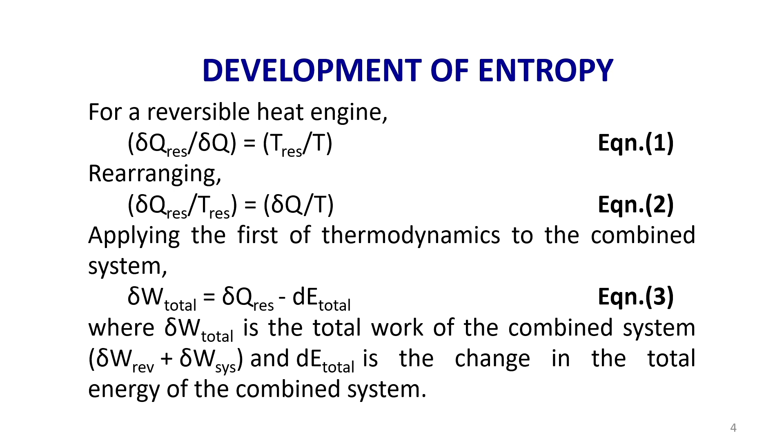This is based on the equation Q equal to W plus delta E; based on this equation only I have rewritten it here. Now, substitute equation 2 in 3. What is 2? 2 is del Q reservoir by T reservoir is equal to del Q by T. So, substitute 2 in 3.

So, when you substitute, this is 4. Instead of del Q reservoir, I am substituting this term. So, find out the value of del Q reservoir from equation number 2. The left side has no change: delta W total is equal to T of reservoir into del Q by T, that is the first term, minus dE total.

Okay. So, again let me emphasize, W total is the work of the combined system, which comprises both the heat engine, which is of reversible type, and the system, here considered as the piston cylinder arrangement, and dE total is the total energy of the combined system.

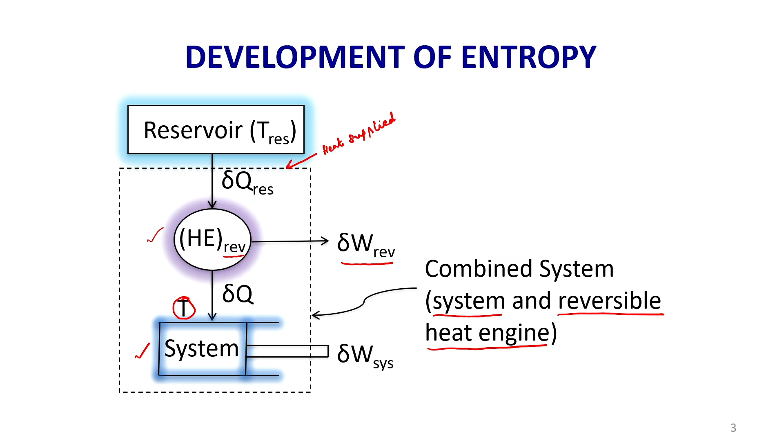That means this reversible heat engine would be producing this much work by operating with a single reservoir only, which is not possible because it violates the Kelvin-Planck statement of the second law of thermodynamics. Therefore, the cyclic integral of W total is less than or equal to 0, and this term cannot be greater than 0.

So, out of these two terms, let me write the total term, this is 0. This is a property, and the cyclic integral of a property is 0. So, the remaining term is only this term. T of reservoir cannot be less than or equal to 0.

So, the only quantity that can be 0 is the cyclic integral of del Q by T, which is less than or equal to 0, because this term cannot be equal to 0. That is equation number 6. This forms the basis for the development of entropy. Later, ds equal to dQ by T, which we will see.

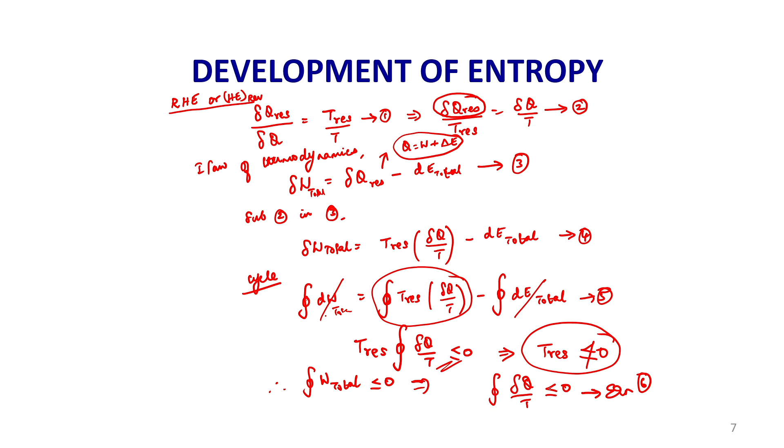Equation 6 is known as Clausius inequality, which is valid for all thermodynamic cycles, whether it is a reversible cycle or an irreversible cycle. If delta Q divided by T is less than 0, it is for an irreversible cycle. For a reversible cycle, the cyclic integral of del Q by T is equal to 0.

If it is less than 0, it becomes irreversible. If it is greater than 0, which is not possible, it is for impossible cases. If it is 0, it becomes a reversible cycle. So, this equation is known as Clausius inequality, because it can be less than 0 or equal to 0, so there is some inequality.

Next, with this background, the term entropy has been introduced. A quantity whose cyclic integral is equal to 0, in this case the cyclic integral of dQ by T, depends on the state only and not on the path of the process. It depends upon the initial state or the final state, not on the path taken by the system. Therefore, the quantity cyclic integral of dQ by T must represent a property.

It should be a property because it does not depend on the path, and that property was named entropy by the scientist Clausius. So, if you take the previous one, cyclic integral of del Q by T, this is nothing but dS, where S is the letter used to represent entropy.

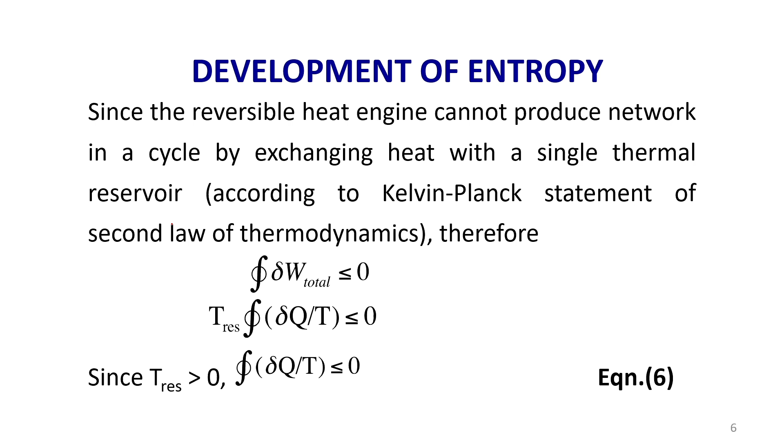So, this property was named by Clausius as entropy. dS is equal to cyclic integral of dQ by T, that is equation number 7. dS is like dU: dU is change in internal energy, dT means change in temperature, so dS means change in entropy. Equation 7 represents the change in entropy of a system during a process.

Entropy is an extensive property of a system and it is represented by the letter S. It gives a measure of molecular disorder in a system. That is the simple definition of entropy. For a reversible process 1 to 2, the initial state is 1 and the final state is 2, so the change in entropy is final entropy minus initial entropy, S2 minus S1.

So, here I will mention, for a process, let me write it here, for a reversible process 1 to 2, this ds becomes S2 minus S1, that is the change in entropy, and integral 1 to 2, lower limit is 1, upper limit is 2, because the initial state is 1 and the final state is 2, integral of cyclic integral of dq by T.

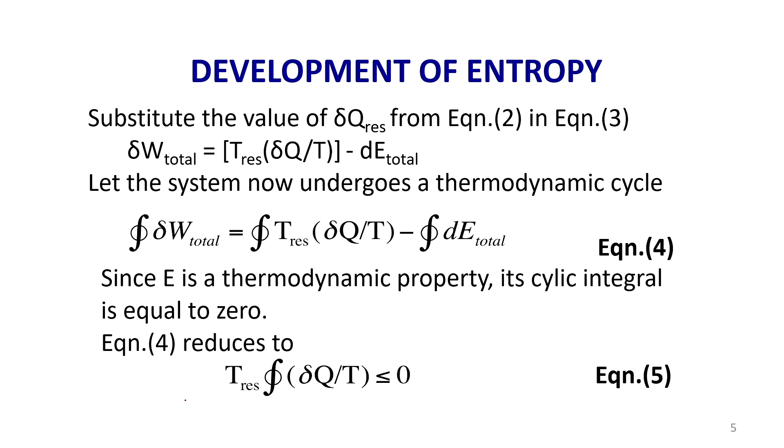So, S2 minus S1, sorry, there will not be any cyclic integral term, because the smaller circle is to be used only for a cycle, not for a process. For a process, when we say 1 to 2 or 2 to 3, it is just the integral without the circle. So, for process 1 to 2, I will write it again, S2 minus S1 is equal to integral of 1 to 2 dq by T, or del q by T. Since I am using the term del, you can use del q by T.

So, if it is for process 2 to 3, the lower limit will be 2, upper limit will be 3, I will write dq by T. For more than one process, that is minimum 2 processes, we can write integral dq by T between the limits 1 to 2 plus integral dq by T between the limits 2 to 3. The smaller circle is to be used only for a thermodynamic cycle.

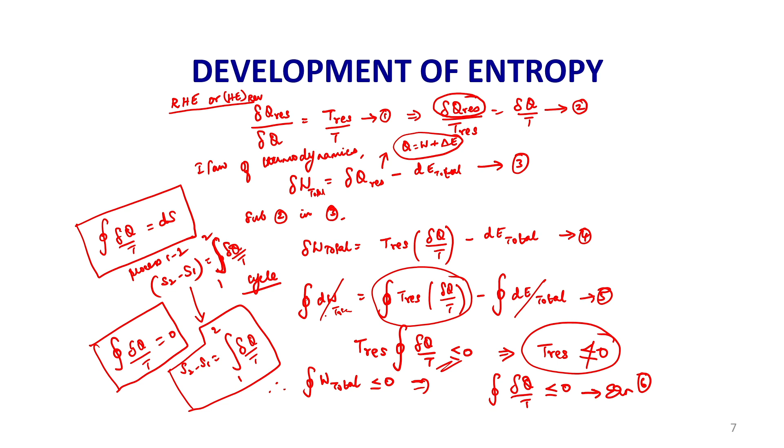So, this is the change in entropy of a system which undergoes a reversible process 1 to 2. The equal to sign indicates the process is a reversible one. When we say ds equal to dq by T, that means the process is reversible, because that is based on the Clausius inequality. For a reversible process, it is equal to; if the cyclic integral of dq by T is less than 0, it is for an irreversible process.

Now, let us see how I am writing equation number 7. Equation number 7 is this equation. Here I am writing equal for a reversible process. For an irreversible process 1 to 2, equation 7 will be written with a less than symbol instead of equal to. Do not put the greater than symbol, that becomes an impossible cycle. It is not possible to have a cycle in which ds is greater than dq by T. So, that is an impossible cycle, where dq by T is greater than 0.

Let us consider the process 1 to 2, dq by T is less than 0, and that means dq by T becomes less than ds, or in other words, rearranged, ds is greater than dq by T between the limits 1 and 2. The entropy change during an irreversible process is always greater than the entropy transfer. The entropy change is S2 minus S1, final state minus initial state. If dq by T is less than ds, obviously ds should be greater than dq by T, like a is less than b means b should be greater than a.

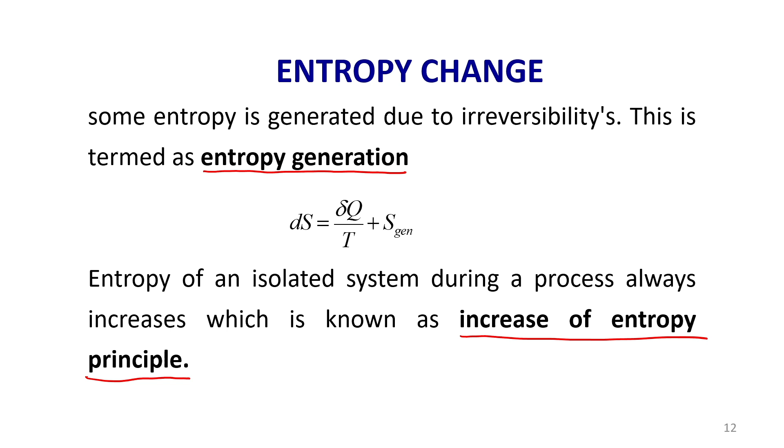The difference between the entropy change ds and the entropy transfer is the entropy generated in the system, which is the irreversibility, the difference between the reversible work and the actual work done by the system. So now let us solve some numerical questions based on these concepts.

1 kg of saturated water vapor at 100 degrees centigrade is condensed to saturated liquid. Condensation, like evaporation, is a phase change process, so the pressure and temperature remain constant. In this constant pressure process, heat is transferred to the surrounding air at 25 degrees. What is the net increase in entropy of the water and surroundings? The mass of water is 1 kg, the temperature of 100 degrees centigrade is converted into Kelvin, and the air temperature is 298 Kelvin, that is 25 degrees centigrade.

First, let us take the properties from the steam table. This is table number 1, because temperature is given here. As I told in the previous class, if the pressure of the steam is given, we refer to table number 2; if temperature is given, you refer to table number 1. So this is table 1. In the first column, you will have temperature.

So, the given temperature is 100 degrees centigrade. So, corresponding to 100 degrees centigrade, I have taken the value of HFG, that is latent heat, 2256.9. Let us see the table. See, this is HFG, and this is SFG.

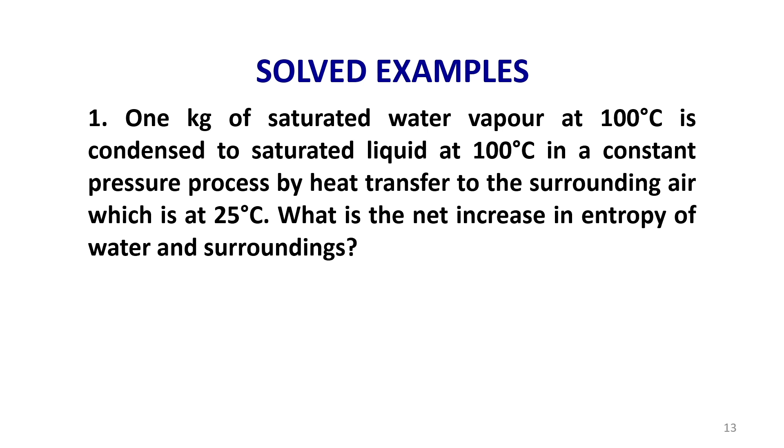So, direct formulas are there, mass into this one, like how you calculated heat rejected. So, this is 1 into the change in entropy. So, SFG I have taken 6.048, that is from the steam table. So, these are simple calculations. And next, the question asked is, what is the net increase in the entropy of water and surrounding. So, we should know the entropy change of the water and the surrounding, then only we can find the net increase.

So, for the surrounding, it's a standard formula, Q by T naught. T naught is the reference temperature. Normally, for calculations, it is taken as 25 degrees centigrade. Even if it is not mentioned, you can take 25 degrees. In some cases, they will take it as 20 also. But here it is given as the ambient temperature, that is 25. So, I have taken the same 25, converted into Kelvin. The temperature should be substituted in Kelvin only, not in degree centigrade.

So, we can calculate the change in entropy of the surrounding. The net entropy change is the summation of the entropy change of the water and the surrounding. So, this is the net entropy change, 1.522. It is a very simple calculation problem. So, this is what we have been asked to find. So, to summarize this problem, the net entropy change is equal to change in entropy of water plus change in entropy of surrounding. Okay.

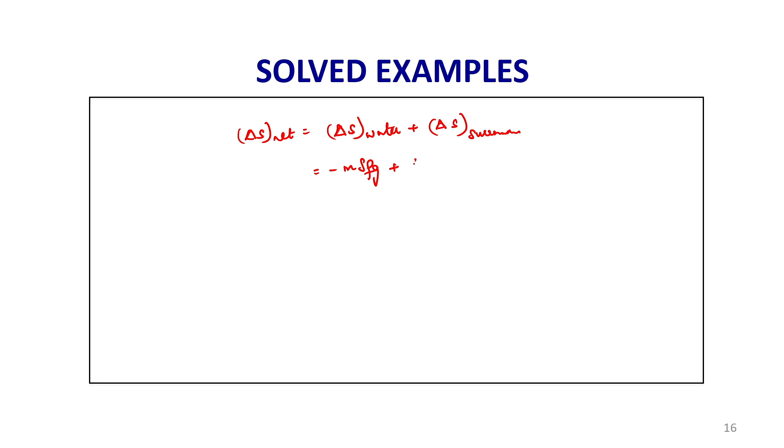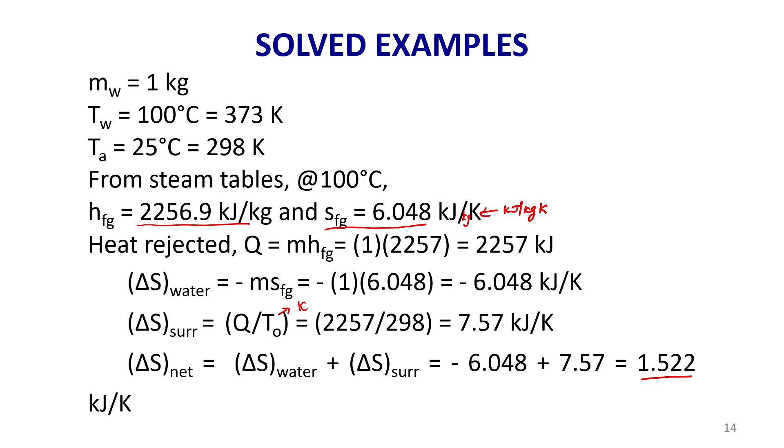This is minus m into SFG, SFG to be taken from the steam table, and this is Q by T naught or TA. Here T naught is equal to TA, the ambient temperature. You can use TA also, okay, but generally in the standard books, the symbol T naught is used for the reference temperature. So, this is a very simple one, so you can calculate.

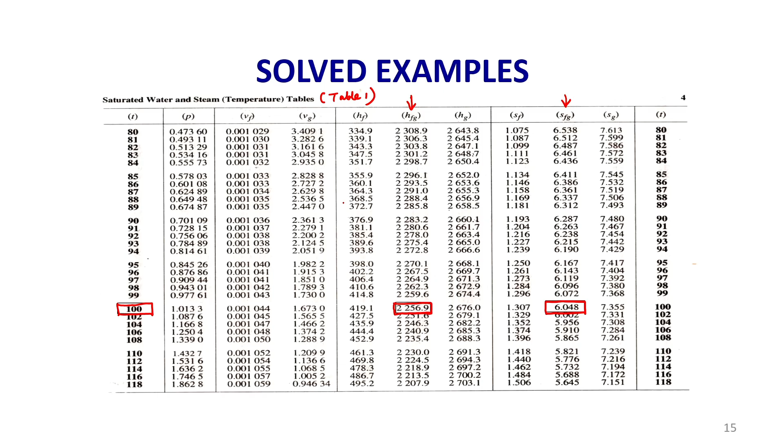So, it has to be found as 1.522 kilojoule per Kelvin. When we multiply the entropy by the mass in kg, the kg terms will get cancelled. So, instead of kilojoule per kg Kelvin, we will get kilojoule per Kelvin.

Let us move to the second question. A rigid tank contains 5 kg of saturated vapor, that is the refrigerant R134A. R134A is tetrafluoroethane, at a temperature of minus 18 degrees centigrade. The refrigerant is now cooled while being stirred until its pressure drops to 1 bar.

Actually it should be like minus 26 degrees centigrade, because the temperature is given. Let us take this as minus 26 degrees centigrade, because one data is given in temperature, another is in pressure. Of course, we can find the saturation value from the table. So, let us take this minus 26, which I have mentioned.

Determine the entropy change of this refrigerant during this process. Assume the dryness fraction of the refrigerant at the final state is 0.86. Let us recollect what we mean by dryness fraction. In other words, it is called the quality of the steam, represented by the small letter x. x equal to 0.86 means it contains 86% vapor and the remaining 14% liquid. So, it is in the two-phase region, a mixture of liquid as well as vapor. Vapor content is more and liquid content is less.

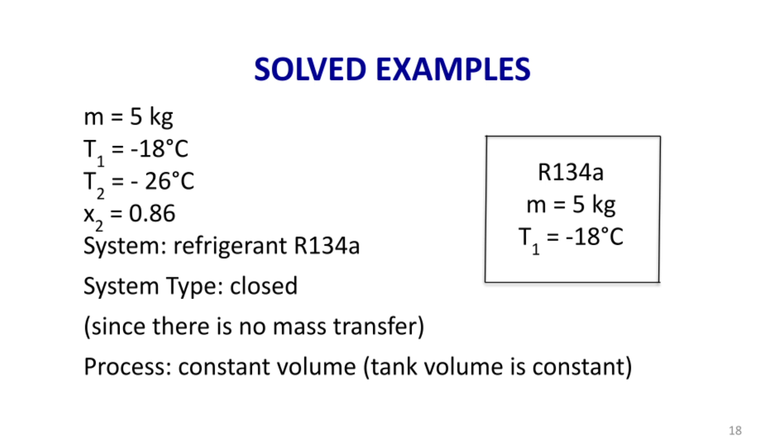From R134A tables. Today we have used steam tables for one problem, and in one of the earlier classes we were using steam tables for finding out the properties of steam. Now a refrigerant is used, so we have to use the refrigerant table for R134A, tetrafluoroethane. So, this is the refrigerant tables and charts. Here you can see R134A tetrafluoroethane. The temperature T2 is given as minus 26. So, corresponding to minus 26,

I have taken the liquid entropy and gaseous entropy, 0.8704. Liquid entropy is this one, gaseous entropy is this column. So, 0.8704, because this table does not give the SFG value directly. So, the difference between SG and SF will give you SFG. So, from the R134A table at minus 18 degrees centigrade, read out the SG value.

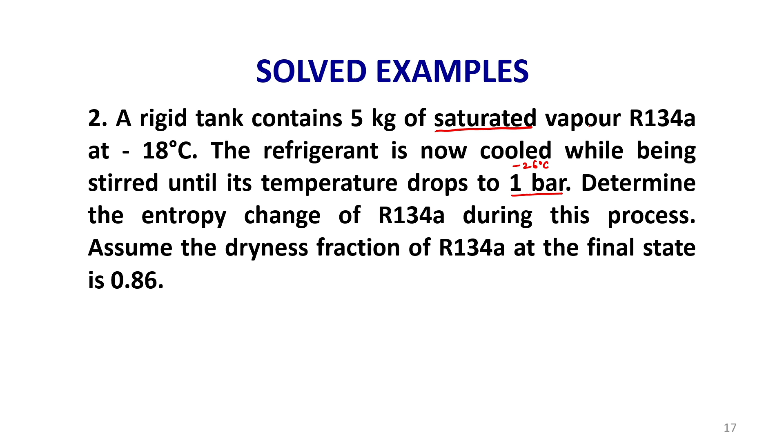So, at minus 18 I can directly take the vapor entropy, SG1 equal to 1.7399. So, this is S1, because the condition of the refrigerant is saturated. You can write S1 equals SF1 plus X1 into SFG1, where SFG1 can be written as SG1 minus SF1. If it is a saturated vapor, the dryness fraction is 1, so this becomes SF1 plus 1 into SG1 minus SF1. Simplifying, SF1 cancels, so the entropy at 1 is equal to the gaseous entropy. That is what I have written directly here. This is a very basic one.

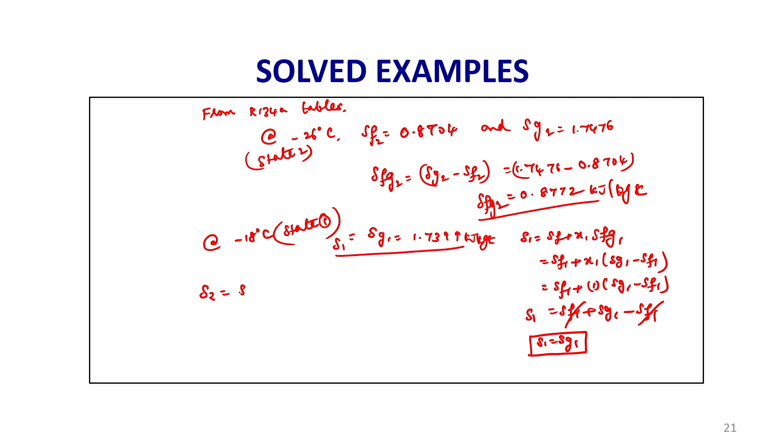Like this we can write enthalpy also: H1 equals HF1 plus X1 into HFG1. The enthalpy at a saturated condition will be HG1 only. So, this is kilojoule per kg Kelvin, here also kilojoule per kg Kelvin, S1. Now, since the dryness fraction is given, I can find out the entropy at state point 2, S2. I can write a similar equation.

Before calculating this one, if it is a saturated liquid, X is equal to 0. If it is a saturated vapor, X is equal to 1. If it is between 0 and 1, it means two phase region, mixture of liquid and vapor.

Now, S2 is equal to SF2 plus X2 into SFG2, and X2 is given in the problem as 0.86. The dryness fraction of the refrigerant after cooling, that is at the end of state 2, is 0.86. Now, we know SF2, X2 is given, SFG2 we have found, because in the table SFG2 is not there, as I said before. We can find the difference between SG2 and SF2.

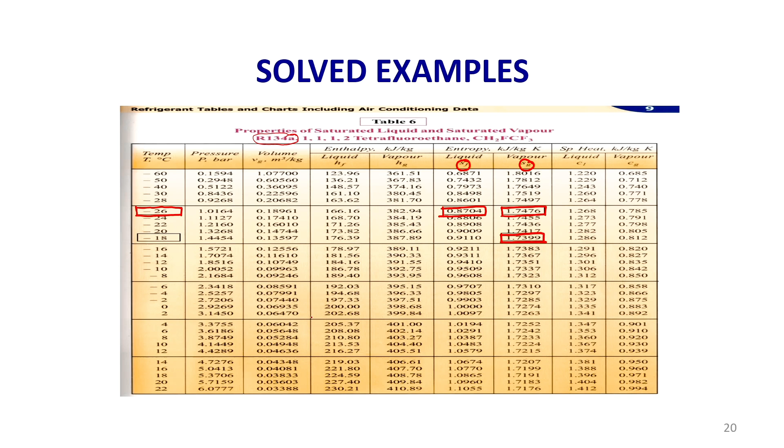So, substitute all the values and you will get entropy at state point 2, 1.6248 kilojoule per kg Kelvin.

So, now the change in entropy during this process is the mass, the quantity of refrigerant, into the entropy change, M into S2 minus S1. M is given as 5 kg in the problem. S2 we have found out, S1 we have found out directly from the table because it is saturated vapor. Only for S2 we have to use the formula SF2 plus X2 into SFG2.

So, that comes negative. The negative sign indicates that the entropy of the system during the process is decreasing. Whenever we have the positive value, it is increasing. Negative value indicates the entropy of the system is decreasing during the process.

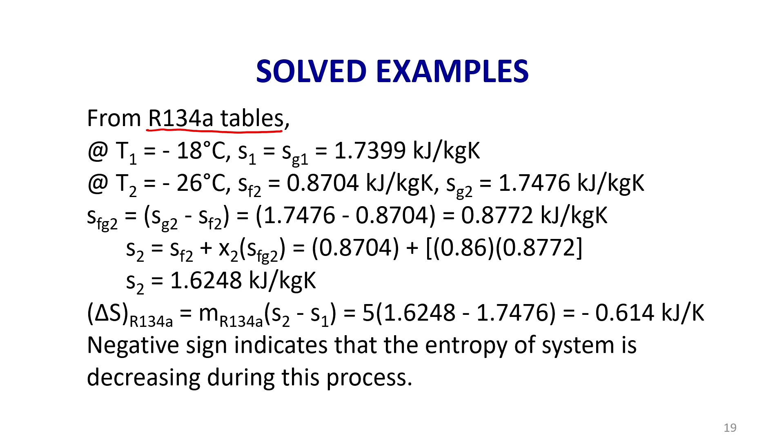Let us take another example. Which of the following processes is more irreversible? A heat source at 1200 Kelvin loses 2500 kilojoules of heat to a sink at 800 Kelvin, or a heat source at 800 Kelvin loses 2000 kilojoules of heat to a sink at 500 Kelvin.

So, in the first case, process 1, source temperature T1 is 1200 Kelvin, sink T2 is 800 Kelvin, and the amount of heat rejected during process 1, I am writing Q1. There are two different situations. The first one I am taking as process 1. So, this is equal to 2500 kilojoules. Now, the change in entropy for process 1 can be calculated as,

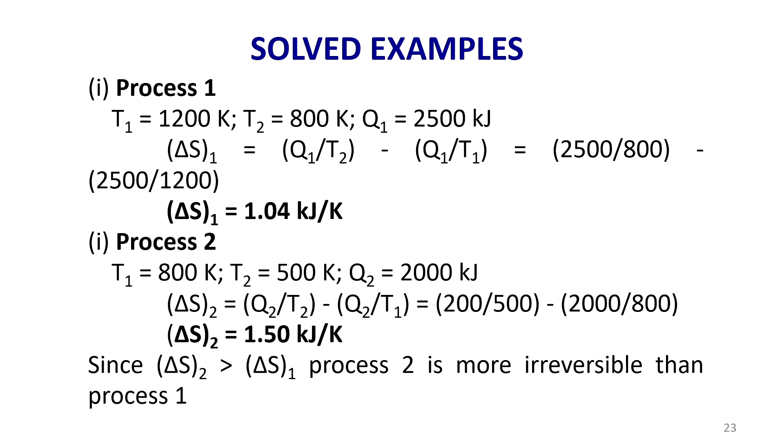Since the entropy change of process 2 is more than the entropy change of process 1, process 2 is more irreversible than process 1. So, this is one practical example which I have taken, just to find out the amount of heat lost by a device which is operating between two different source temperatures and two different sink temperatures, and of course, the heat quantity is also different. A similar exercise can be done in case the amount of heat lost is the same, by varying the source temperature and the sink temperature.

So, to summarize what we have discussed in lecture number 5, we started with the development of entropy, how the concept of entropy has evolved, and what is the Clausius inequality: the cycle integral of dQ/T is equal to 0 for a reversible process, less than 0 for an irreversible process, and if it is greater than 0, the process becomes an impossible one. Then we saw what entropy generation is: the difference between the change in entropy and the entropy transfer, that is dS minus dQ/T, the integral of dQ/T for a process 1 to 2.

If the entropy change is equal to the entropy transfer, then there is no generation of entropy, that is S gen is equal to 0. Then we saw the principle of increase of entropy. Based on these concepts, we solved problems. The first problem was the entropy change for the condensation of steam. Next, I took a refrigerant: refrigerant R134a is cooled from minus 18 degrees centigrade to minus 26 degrees centigrade, and we solved for the entropy of that system.

And now I have taken two different source temperatures, two different sink temperatures and two different quantities of heat rejected, to see which process, process 1 or process 2, is more irreversible. Since the change in entropy, delta S, for process 2 is more than for process 1, process 2 is more irreversible than process 1. So with this I conclude lecture number 5.